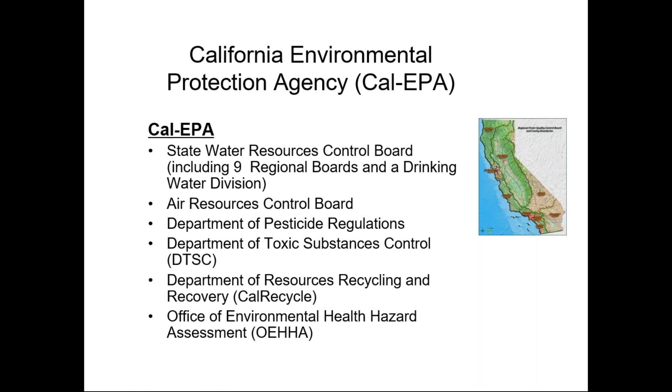Oh, I'm sorry. Jumped too fast. Okay. With respect to groundwater remediation, that jurisdiction goes to the regional water quality control board. As we mentioned in the last slide, in Cal EPA there is a water resources control board, and there are 9 regions within California. The regions are divided by watershed. And I work in region 4, Los Angeles. If you see the map, we're in a very small geographic area, but because it's very industrialized, there is a lot of pollution. So a lot of work.

Some of you may have experience coming to California to do environmental cleanup. Certain areas you probably go to more often than others, and LA is one of them. Okay, well, quickly just to give you some perspective regarding the state of California.

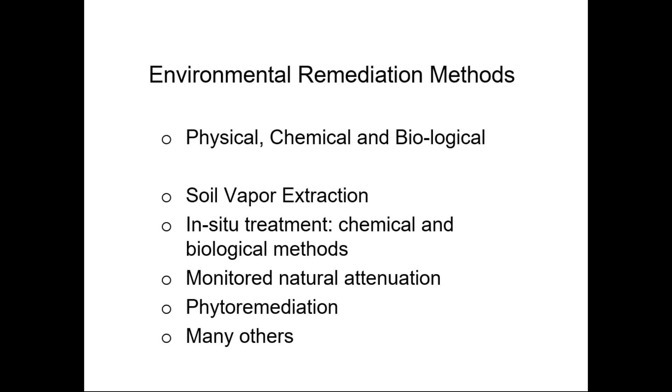Okay, environmental remediation methods. Just very quickly, I think most of us already know there are physical, chemical, and biological methods, and there are certain common ones used the most. At least what I have seen in California are soil vapor extraction, in situ treatment, monitored natural attenuation, phytoremediation, and many others. We can talk about that during the Q&A. All right.

In terms of those three factors, environmental, social, and economic, in this presentation we're going to go through their analysis for certain methods. Those methods are listed here. We'll go through very quickly and see how they relate to those three factors.

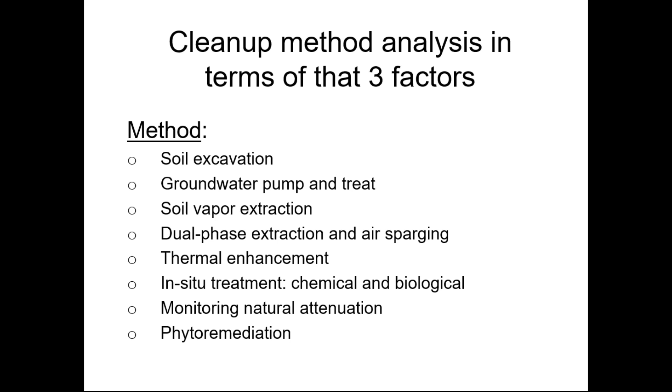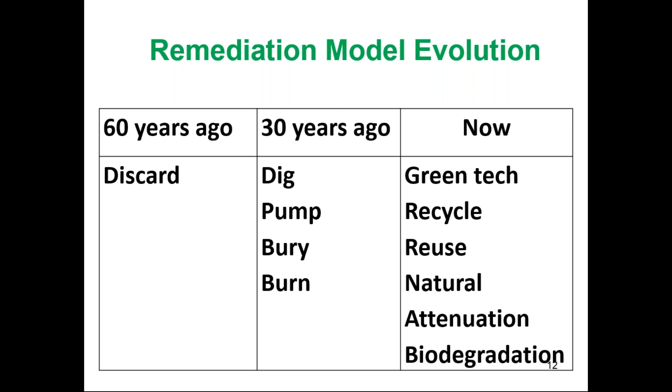All right, this table I made up. It's sort of a summarized remediation evolution in the past. Sixty years ago, remediation really meant just throw it away. Thirty years ago, remediation progressed a little bit, and that meant dig, pump, and bury or burn, just trying to do something. Nowadays we emphasize green technology, recycle, reuse, natural attenuation, biodegradation, and so on and so forth. It's turning a little green these days.

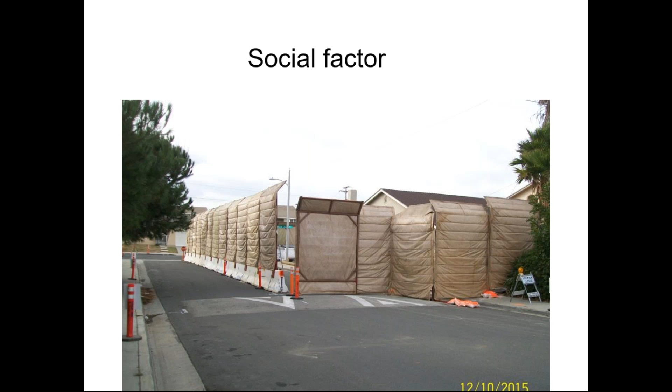All right, this is the case I just showed you a couple slides ago. This is a house built on a historical refinery waste dump pit. So this caused a lot of problems later on. At the time they were building the house, they didn't really recognize that refinery waste can be hazardous waste. So nowadays the oil company has to come back to dig the dark soil out to meet the residents' expectations.

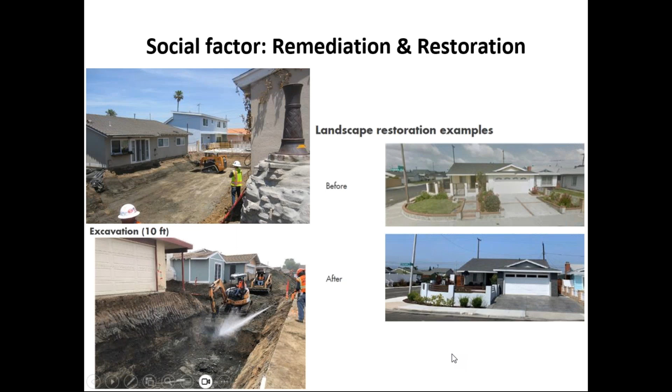On the right-hand side of the slide, you can see they have to sort of remodel, replace what they dug out on the surface. The house on the top is before the excavation, and below is the same house. You can see the front. They completely renovated it. So the social factor sometimes is very costly. I think that's the point I want to make.

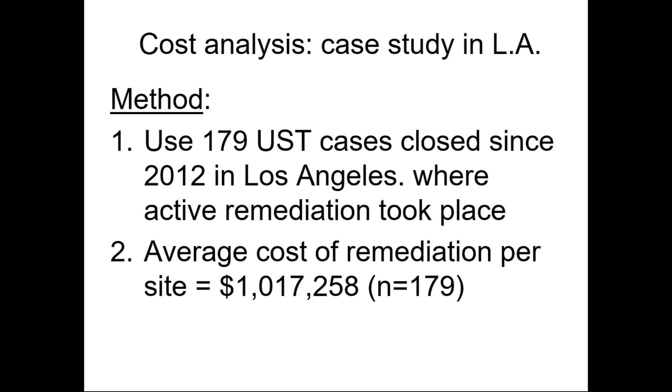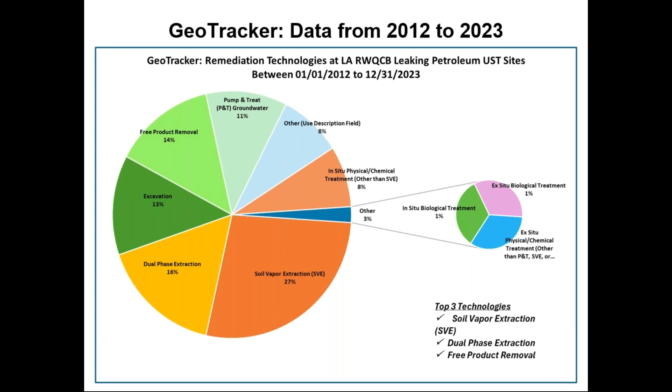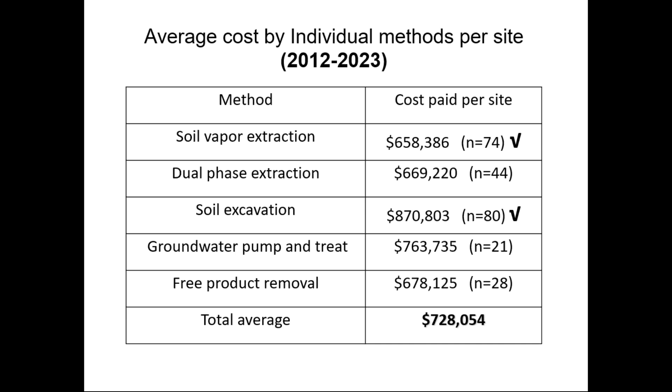All right, so here's a summary for that: $728,000 average. We compare each remedial method—soil vapor extraction, dual phase—and we find out soil vapor extraction cost is lower than average, and dual phase is lower than average. However, if you want to do soil excavation, that would be higher, and pump and treat higher, and the free product removal is lower. That's the comparison.

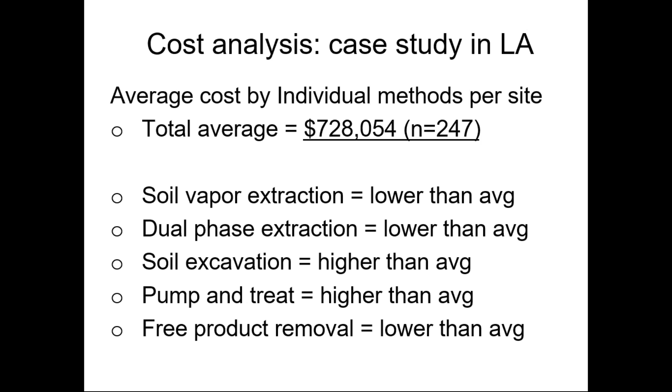All right, with all of this, social things, we'll talk about economics, and then let's talk about each method a little bit. For soil vapor extraction, if you use the three factors to do your analysis, you will find some pros and cons. I think most people here are pretty much familiar with this method, and I don't have to go through the details.

The last arrow, you can see this method is a little bit noisy. This is really a social factor, right? So if it makes noise and people surrounded complain, we'll have to do something. So that's a certain way—environmental, social, and also economical. You can see the cost is moderate. So we compare in our region, and that analysis will find the cost is below average, right? If you still remember the last slide.

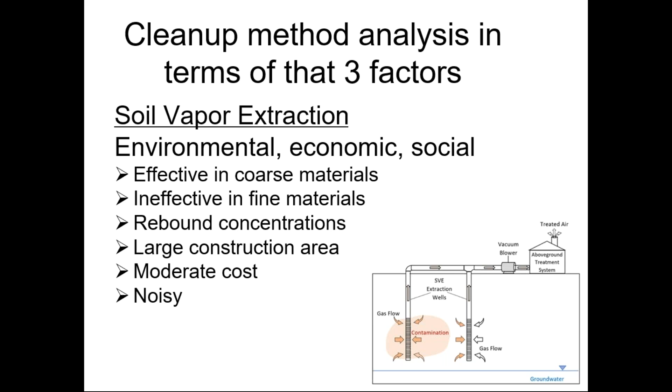All right, for soil excavation, of course it's a little bit costly, and it's interruptive. Interruptive can be considered a social factor as well, because people—you can see the picture—there are some businesses around here. If you have a huge hole right here, people will not like it. But it has some advantages, and for fine-grained material, for example, excavation is more effective than soil vapor extraction.

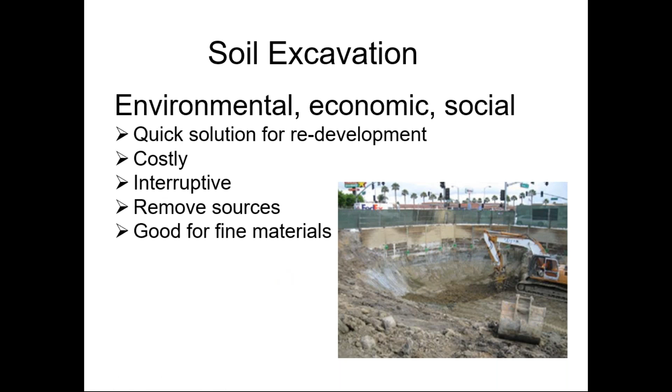Okay, here's the dual phase. Dual phase is more effective, particularly people use it to clean up the capillary fringe, right? I don't want to spend too much time, because I think most people here are very familiar with those methods and the pros and cons particularly.

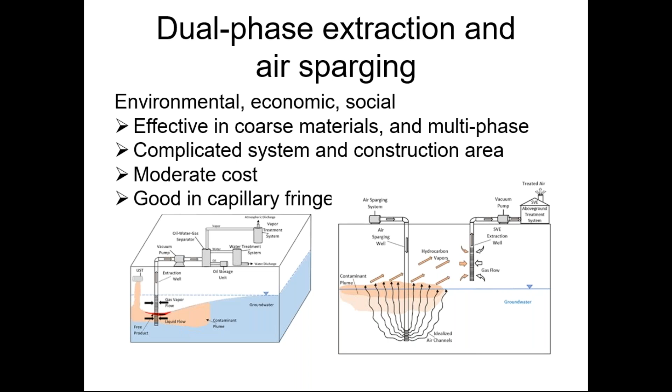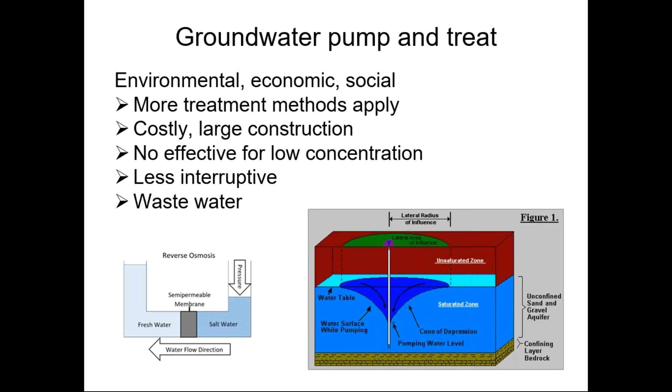Groundwater pump and treat. This method is used less and less, as far as I see, because I think it takes too long. So if you put this method into that three-factor analysis, you can find the pros and cons. There's a major problem we have as a water board: most people pump the water out and discharge it into a storm drain. We think that's a waste of water. So that's why more or less we start asking them to re-inject back to the aquifer. That, of course, increases cost. So this method I have seen people use less and less.

Thermal treatment, I think this method is being used increasingly. More and more people are using it. This one has to be most effective combined with vapor extraction, soil vapor extraction. That's good for fine-grained material. If you've got sandy material, of course, vapor extraction is sufficient. If you have a bit of silt, a fine-grained material, this one will help evaporate the volatile things. Of course, the energy consumption and the cost are a primary concern. Another thing about this method is it's interruptive—why interruptive? Well, when you put all of this heater poles in the site, you have to circle them out. You just can't let people walk on the surface, right? So that's interruptive—you cannot do anything else once in process.

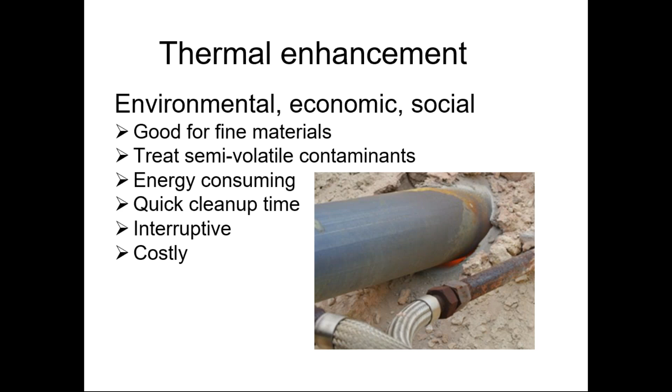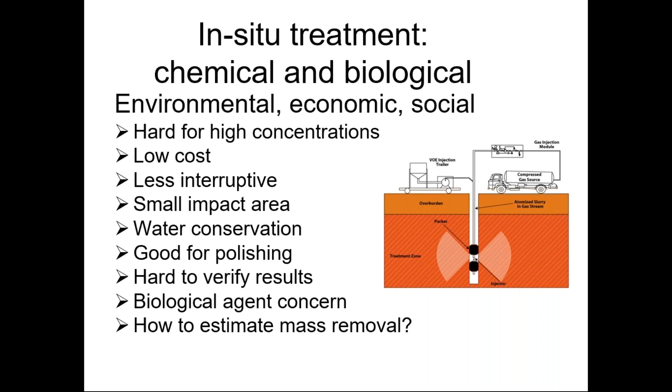So that's a con, I guess.

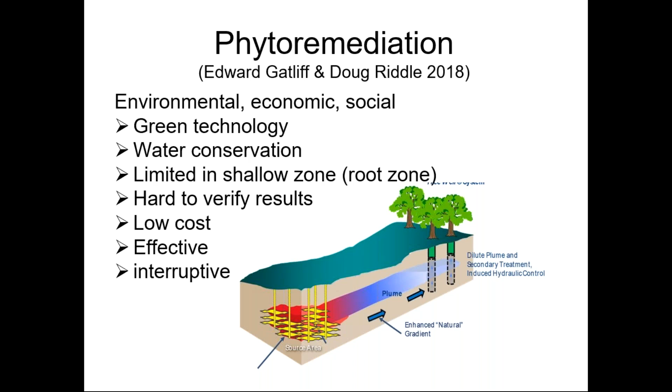There are some pros and cons listed here. The only problem is they're using the root zone to do the cleanup, but that's pretty shallow, so if you have very deep groundwater, that will not work. Shallow ones will be a choice—I'm not sure it will work very well, but it certainly will be a choice. The cost is low, it's effective. I put 'interruptive' here because I think the next slide will show—if you have to plant a whole bunch of shrubs or plants on the site, that really takes a lot of space.

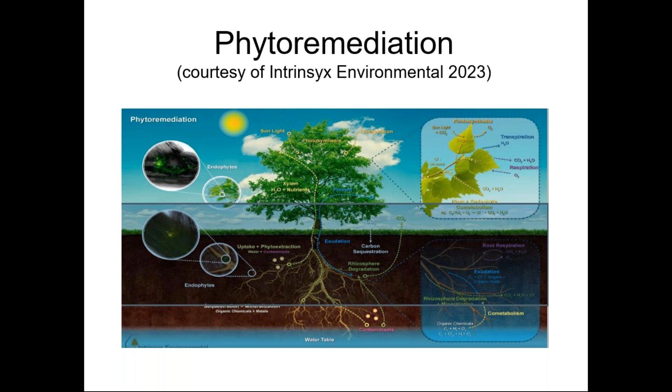Okay, this slide is courtesy of Intrinsyx Environmental. They did a lot of studies on what kind of plants—of course, we encourage using a very deep-root type of plant, so they can take up the groundwater and in the meantime take up the dissolved phase contaminant.

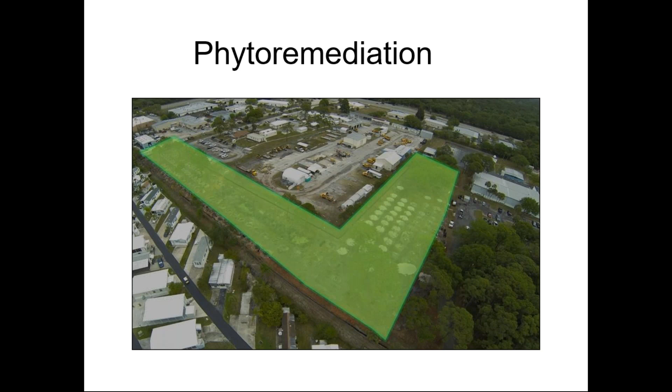Okay, this is a phytoremediation case study, coming from that company showing it to us. I think the goal is to contain the contamination plume, so that's why they have this sort of 90-degree angle type of zone to contain that plume. I don't know about the result—they told us it's very effective. So that's another case study they're showing—this phytoremediation zone is also used as a barrier to contain the groundwater contamination plume.

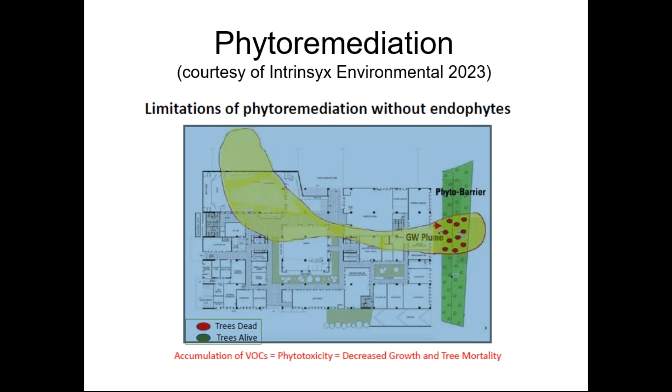All right, so I went through those methods very quickly. I know most of us in the webinar are very familiar with those methods. I just want to go through that method with the three factors: environmental, social, and economical.

There are some other methods we don't have time to talk about, and we've seen widely used: PRBs, which people use to contain the plume. Then there's modular horizontal wells being used to install soil vapor extraction wells, which we've seen more and more these days. For areas like Los Angeles, horizontal drilling has certain advantages because we're so populated with so many buildings, and there aren't too many open areas that can be used for installation of remediation wells. And there's in situ oxygen and bioventing. This is very similar to in situ injection, but right now bioventing is sort of separate from others.

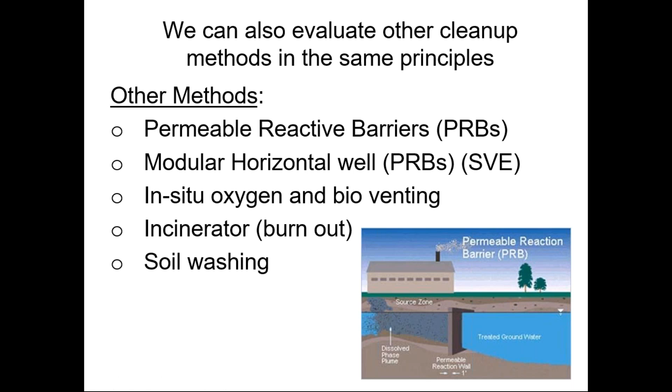With those three factors, okay, let's come back to our subject: the sustainability dilemma, how to set up cleanup goals. When I started working with the agency as a junior staff, I've been facing the question of how clean is clean. 30 years later, and I'm still having the same kind of question: how clean is clean? I think the cleanup goals are moving, right? It's advancing with people's understanding and new technology. That's why we're talking about sustainability here.

Cleaning it up to background level is certainly a cleanup goal you can set up. Then it has to be cost effective. Apparently there's both, maybe conflict. Then there are risk-based cleanup goals you can set up. Then more importantly, as I mentioned earlier, public acceptance. I think if the public won't approve the way you're doing business, that's very hard to implement.

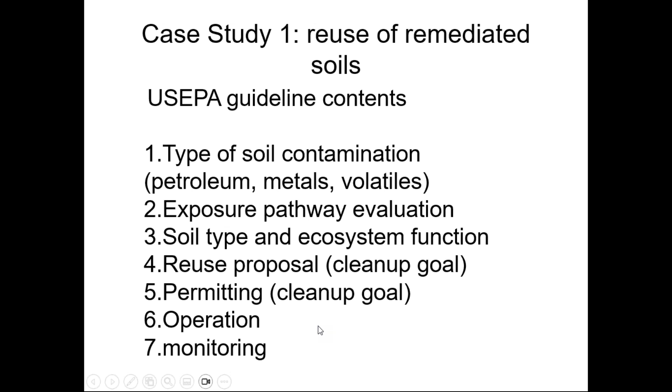You're going to use it. You treat the soil, then you reuse it. Then there's the permitting process right now in California, where the agencies issue that kind of permit. Then of course you put it into operation, and after that you need monitoring. This is the EPA guideline.

Here is an example from our regional board, and in the upper right-hand corner, that's the real document — the permit we issued in writing. In the permit, it was highlighted like this, specifying the specific volume of soil you can use, and where the soil is coming from. That's coming from the oil and gas extraction field. They have a storage pond.

The oil comes out, right? They do the water and oil separation at the surface. The separated water is put in the pond. The pond sometimes has no bottom, and sometimes they have clay at the bottom. But anyway, they put the water in there, then re-inject the water back to the deep layers where the oil comes from. So the soil they want to reuse only comes from the bottom of the pond — they cannot mix it with other contaminated or impacted soil.

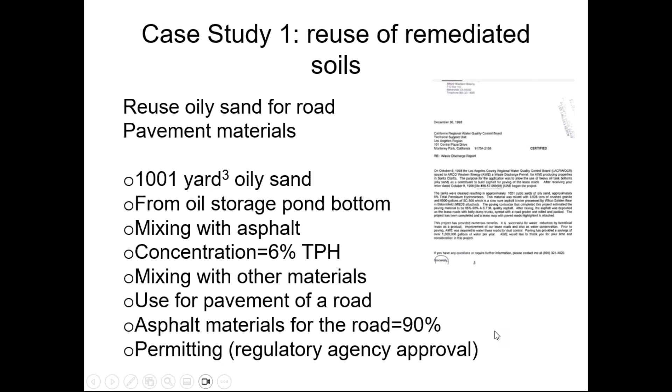It's also required to mix with asphalt, with concentration requirements and mixing specifications for other materials also specified. That's only used for paving roads. The oil and gas field is pretty big, so sometimes they need to pave the road, and the asphalt material in the road is required to be 90% — this is a pretty tight, stringent requirement actually. Then there's the permitting — they got approval in the permit and need to hold the permit to proceed.

That's just an example. So now I think I'm finishing my talk. Before I go, there is something to think about.

And if we're the public agencies, if you want to have a public acceptance talk, we can have another class. So I think the bottom line is that you need to get the public, the residents around you, to support what you're doing. Usually they do, because you're doing a cleanup of the environment. That's a good cause.